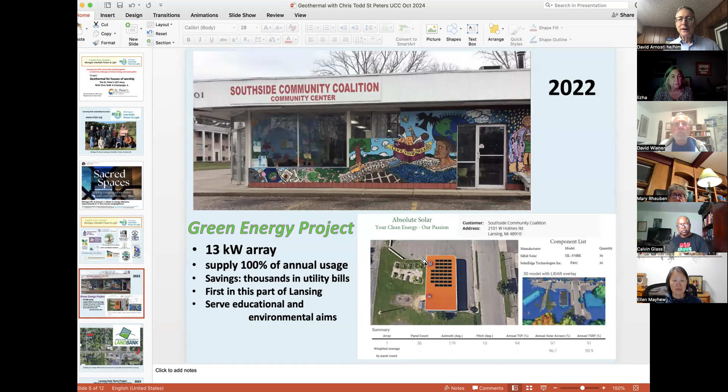And in 2022, we came together and did a fundraiser and supported the Southside Community Coalition in South Lansing, which is an over 20-year-old community center that delivers lots of social programs for the neighborhood, and we solarized their headquarters. You can see a 13 kilowatt array on top of their roof, providing 100% of their electricity.

And with the solar panels that we provided, this house will have practically zero energy costs because it's an all-electric home that has heating and cooling provided with heat pumps. And that's the topic for this evening.

So just a couple of diagrams. Not to go into all of the nitty-gritty on the physics, but heat pumps are a modern way for heating and cooling because they move heat around rather than burning fuel to produce heat. And moving heat is much more efficient and is much greener than any other method for heating and cooling.

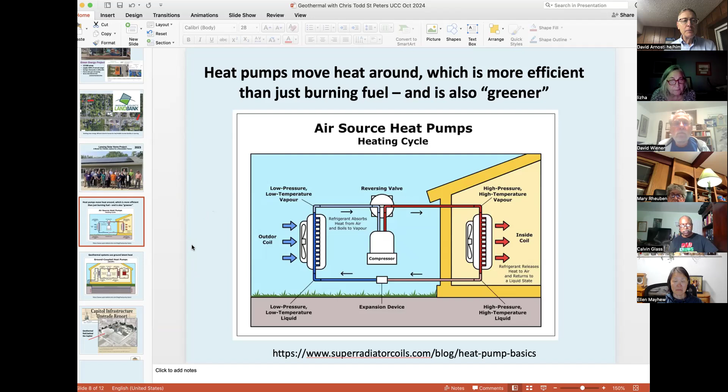You may have seen heat pumps on houses in the area or commercial buildings, which work as air conditioners in one direction and heaters in the other. A special kind of heat pump is a geothermal system where instead of extracting heat from the air, you're extracting heat from the ground, which is even more efficient and particularly suitable for cold climates.

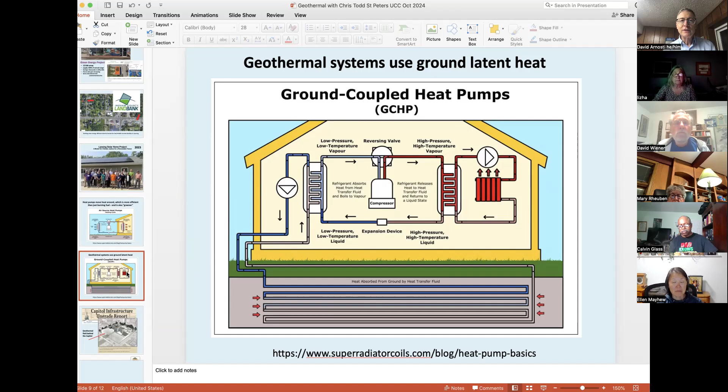A number of houses of worship I know have been considering doing something similar, and we thought it would be really interesting to hear an experience from somebody who's actually gone through this. Chris Todd from St. Peter's Church, their church was featured on the internet for their recent work, and she's going to share with us some pictures and description of how their house of worship went about updating, modernizing, and making more green their whole heating and cooling system.

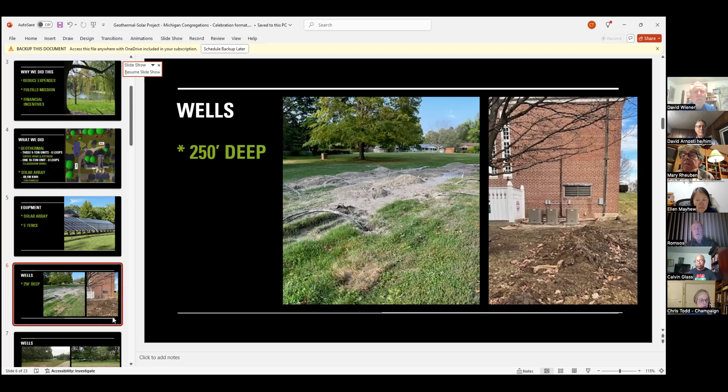You can see it's pretty raised there, and our contract did not include them grading and seeding and things, so we had to do that ourselves. This was after we had leveled those well areas, and this is what it looks like today - I actually went and took a picture. We have not actually seeded yet, most of this is weeds, but we will start trying to reclaim that more now in the spring. So you can see that you can get your spaces back to normal.

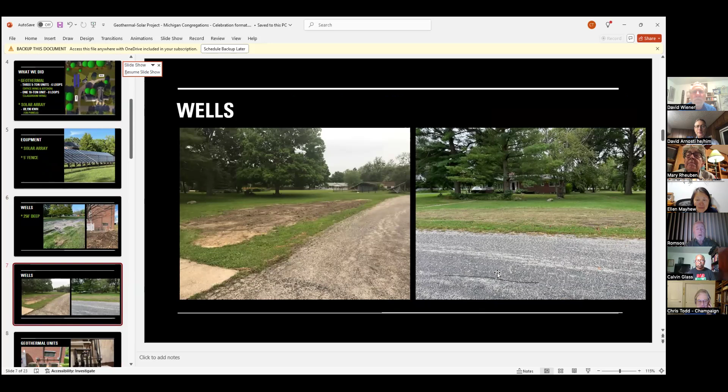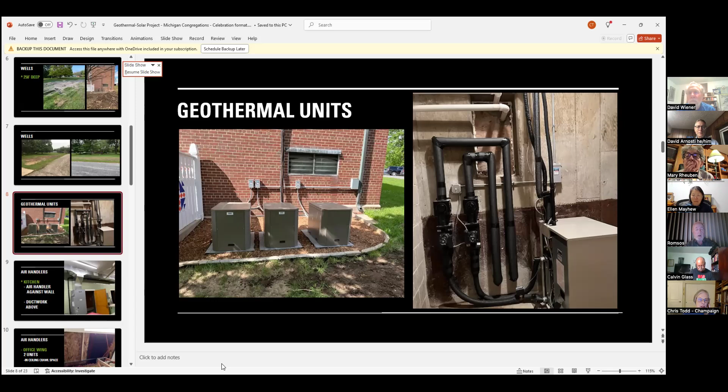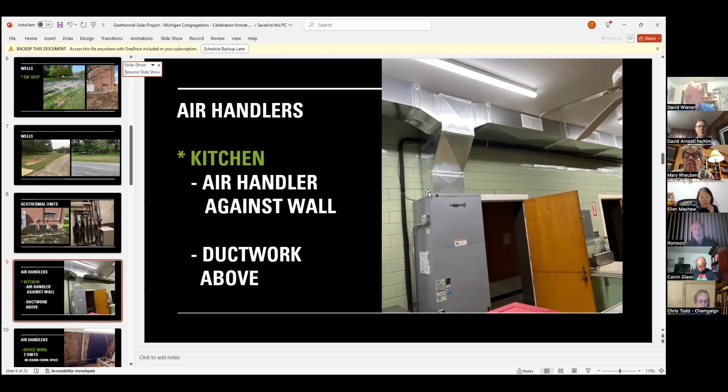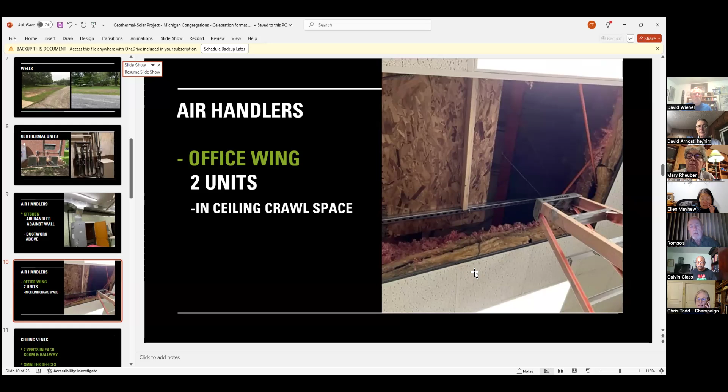They put the ceiling back, the hanging ceiling. It looks just like a normal ceiling. The only difference is there are vents in the ceiling that the air comes out of. I don't have a vent to show you, but basically it's just like a vent in the ceiling, and that's where the air comes out.

Upstairs we have 2 vents in each room and also in the hallway. The smaller offices share a thermostat. The system we put in only allowed so many thermostats. I found out today we could have had a larger system put in and been able to have a thermostat in every room, but that would have cost more.

So we are having a bit of a problem because our main office and our business office share a thermostat. What we found is that the main office is hotter in general than the business office, partially because we have the copier and other equipment giving off more heat, and partially because the sun shines in those windows more.

So we're having a little trouble regulating those 2 offices, but they are going to be putting in a mechanical damper on those ceiling vents so that we can close off the business manager's office a bit, and hopefully that will reduce the temperature in there, and also make it cooler in the main office in the summer, which they need. We have still kept our steam heat going into all of these areas.

The reason for that is that Illinois has the potential to get very cold. We don't get terribly cold often, but it has gotten down to 20 below here. And heat pumps are not terribly helpful after the low 30s in general.

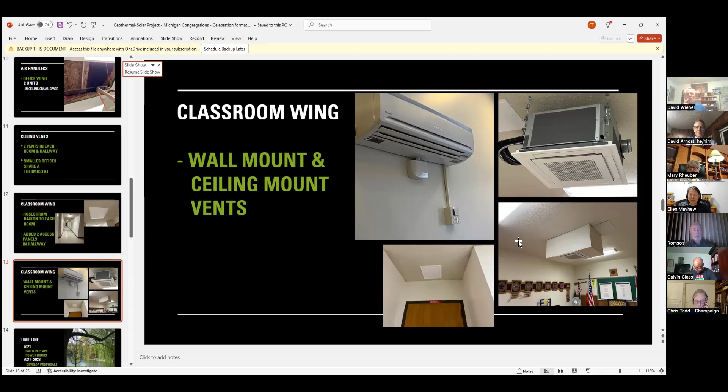I want to tell you our timeline. We started in 2021 working with Faith in Place, which I believe has some connections with the Interfaith Power and Light system. They recommended that we go to things called power hours. Here in Champaign, Urbana, we have both geothermal and solar power hours, where the community can come to look at how to do these systems. We learned so much, and that's where we got hooked up with the contractor that we used for both the geothermal and the solar.

Between 2021 and 23, we worked with the geothermal contractor to develop the proposals. He came in and evaluated our whole HVAC system, did multiple proposals to try and get it to the point that we could use it. We tried doing it in the whole building, but it was just not possible, so we worked down to 3 areas. He did this all at no cost to us, hours and hours and hours of his time. And I asked him why he did that.

This is not usual. And he said, well, partially we love geothermal, we want to promote it. And he said, the other thing is we found it's good for our business. We may not get a contract out of this for geothermal, but when people need HVAC things put in, they call us. So that was his rationale for putting all that time in for free. We did, of course, go ahead and do it.

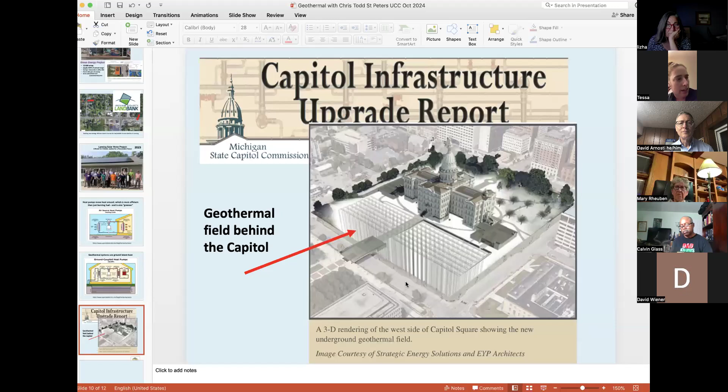My only other questions were about the contractor. Could you speak a little more about finding your contractor? One thing I noticed, because of where we are in our considerations, is that the engineering report came relatively late in the process timeline, and it sounds like you started with a contractor who you really trusted. I was wondering if that's an HVAC contractor who does geothermal.

We hooked up with this contractor at the Geothermal Power Hour. He was the contractor designated by them to go to if you had questions, and so we really liked him. Again, he was working for no money. And I had been part of a different congregation that had separately gotten a plan from a different contractor to put geothermal into that building, so I had a little sense of how to evaluate his plan. His plan seemed almost more thorough and was less costly than the other one, so that gave me a little confidence.

Plus having recommendations from others of the systems he'd put in, that's kind of how we went with that. He would have done the engineering study anytime we wanted, but we just chose not to until the end, because honestly I wasn't sure if our congregation would approve this. It's such a big project for such a small congregation, and we didn't want to spend $5,000 or $10,000 for no reason.

So regarding the question about contractors, I did have a chance to talk to Jim Hall, their contractor. Their firm has been doing this for 40 years - I think his father was involved in geothermal too. They've put in around 2,000 plus systems, including large ones like this, and I think experience is probably a critical part of that. For Michigan, there's a geothermal association at earthcomfort.com, with a number of Michigan installers listed, including representatives for Water Furnace, one of the two brands that Chris's congregation used. So that might be a place to start looking - the geothermal trade association, earthcomfort.com.